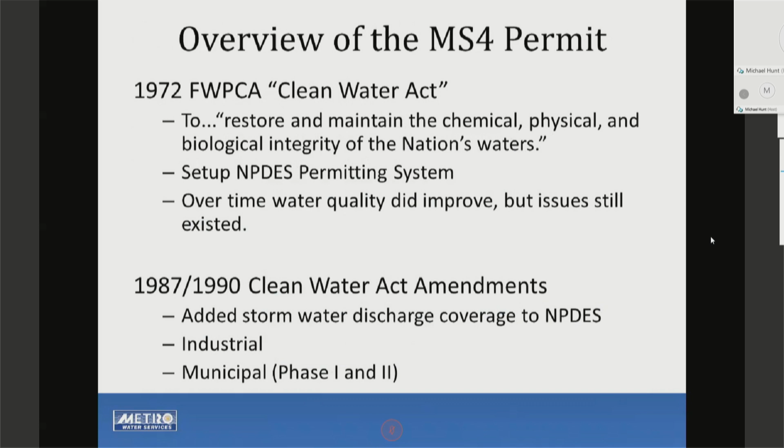That led to the 87 and 90 Clean Water Act amendments that added stormwater coverage to NPDES. It included industrial facilities that might not have a processed wastewater discharge per se, but just by the nature of their facility had stormwater runoff that introduced pollutants into the system. It also added phase one and phase two municipal permits, which included the stormwater systems in cities, phase one being larger cities such as us, phase two being smaller cities and counties. The finding there was that just by the nature of a city being a city, and people conducting the activities they do, without some kind of special and ongoing programs, that can also lead to pollution making it into our waterways.

This is a schematic from EPA that goes into the general activities that can contribute to that, all the way from factories, industrial facilities, private sanitary overflows, different types of activity, even non-point things like the application of fertilizers, herbicides, and whatnot can play into what contributes to pollution from urban wet weather flows.

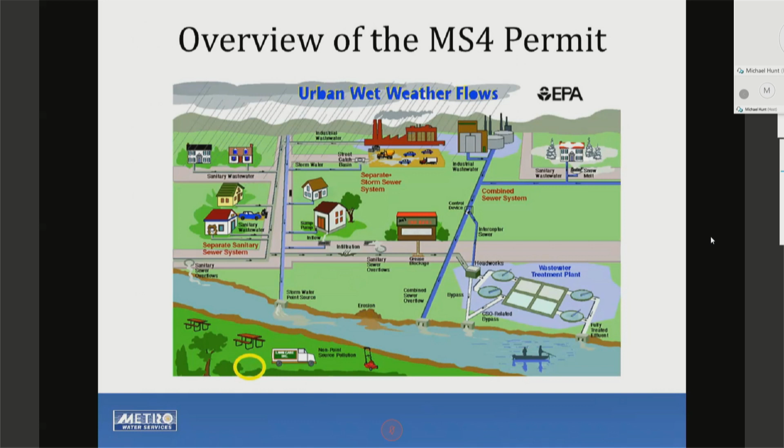This is a map of Davidson County. Our MS4 permit does not cover the entire Davidson County area. There are some exceptions by rule. Those exceptions are the satellite cities. They are generally covered with their own phase two permits. We do try to coordinate with them as it relates to getting the right information to the right people, but they have their own programs.

The brown areas show the combined sewer areas, which means stormwater and sanitary waste is combined in routing to our plants, and during certain periods of heavy rainfall may overflow. The rest of the area is the MS4 permit area. So a very big area, being a municipality.

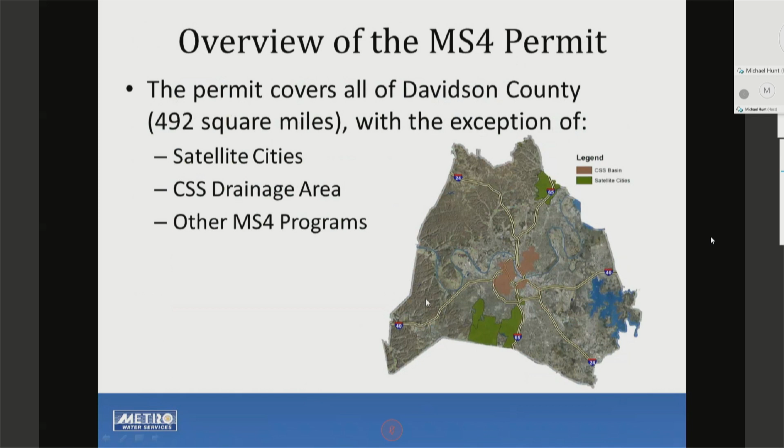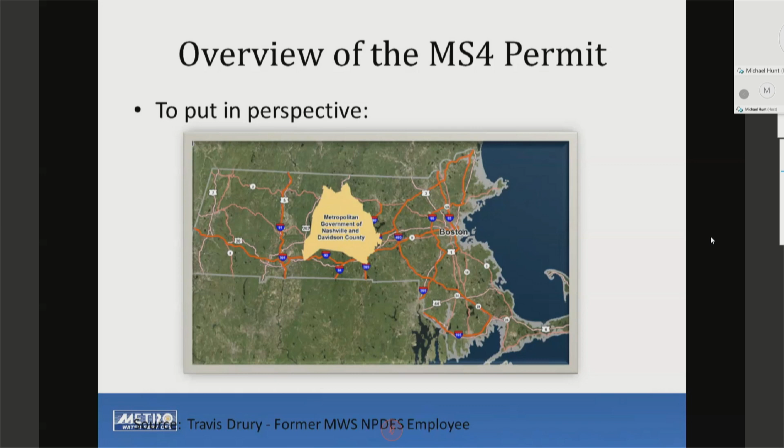We are a very large MS4. We've looked at over time how we rank, and with about 500 square miles, we're one of the larger MS4s in the country, certainly one of the top 10. One of our former employees put this together comparing us to Massachusetts and Boston, so you can see we're a pretty big MS4 permittee.

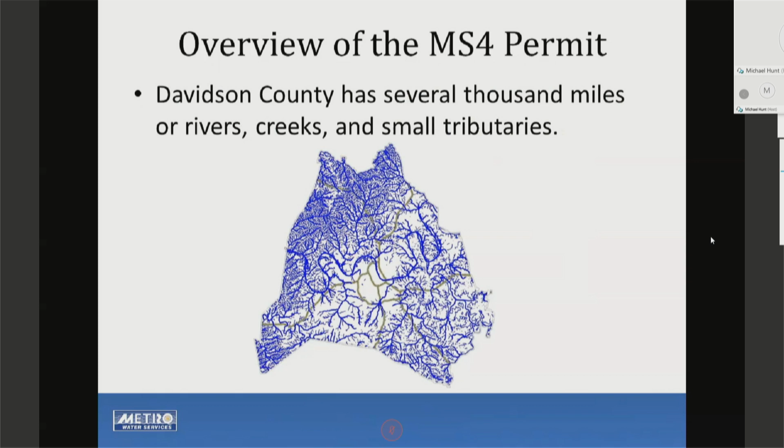One of the reasons it's so important that we do what we do with our MS4 permit is that Davidson County is blessed with a lot of water resources. We have thousands of miles of rivers, creeks, and tribs. So what we're doing to prevent polluted runoff is very important to Metro, and even more reason we're attentive to these permit requirements and doing what we need to do to not have either chronic or acute discharges.

So how all of this got started was in July 1st, 1996, Metro was issued what's called an NPDES permit by EPA and TDEC. Being a phase one permittee, our permits always have to get EPA approval, Region 4 approval as well. So we're working all the time with TDEC mainly, but EPA has a role as well. We got a permit in the beginning that contained any number of programmatic elements that we as a city were expected to do to curtail and, to the maximum extent practicable, reduce stormwater pollution to our MS4.

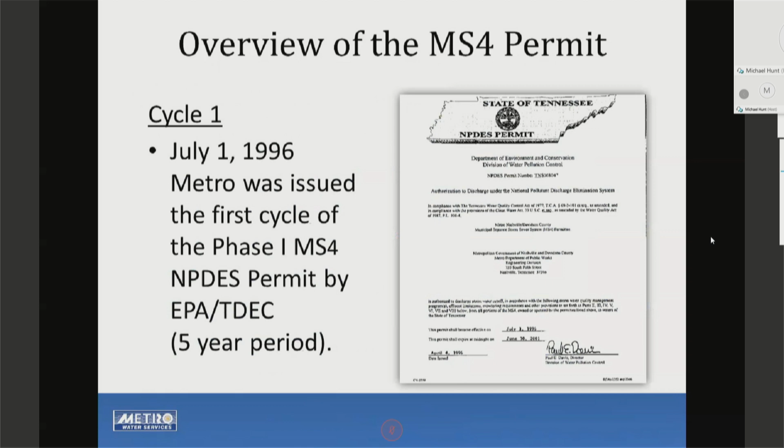Some of the things in that cycle one, we had to establish regulations as it related to quality. We already had the floodplain regulations and some of the grading permit regulations, but we had to modify that to bring in development. We had to bring in a non-stormwater, or what we call an illicit discharge ordinance, Metro Code 15.64.205, which basically makes it illegal to have a non-stormwater discharge to the storm sewer system.

We had to collect GIS information for that 492 square mile MS4 permit area. That's an old number — the last time I checked, we're up to about 250,000 MS4 features, and we are on an ongoing basis. We have one person dedicated to doing nothing but updating that MS4 data. I will tell you, in the beginning that was quite a chore to go out and collect. We had, I think at one point, 18 teams of two going out collecting that data. So it's very valuable, and it's something we maintain and update all the time.

I would just say at this point, if any of you are doing anything — I know we work a lot with Public Works on some of their cross drain projects — but anything you're doing that might change an MS4 element, a pipe, or whatever, please let us know, and we would love to plug that into our system because it needs to be as up to date as possible.

We also had to perform field screening on what is now more than about 4,000 outfalls just to make sure we don't have any illicit discharges.

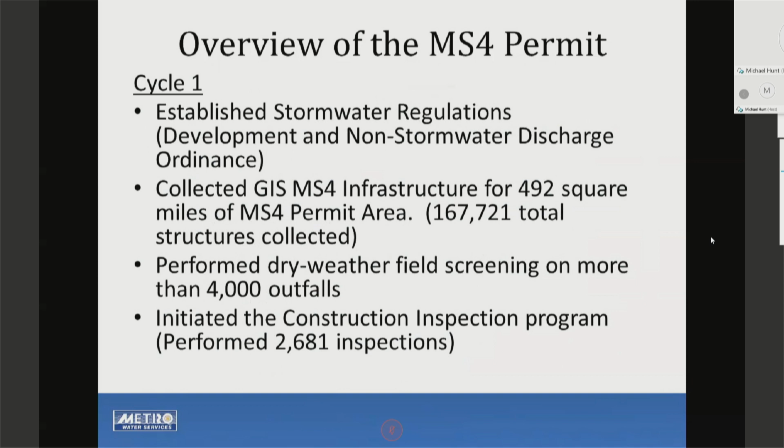This again is an old number. We have performed tens of thousands of those inspections over time, and it's really made a big difference that we see in some of our data.

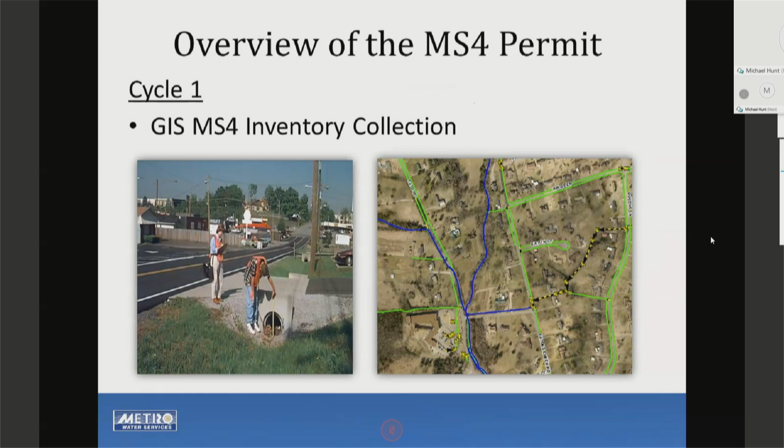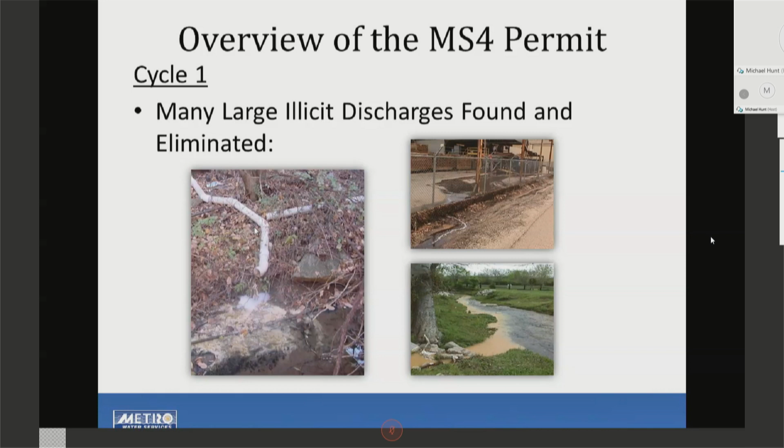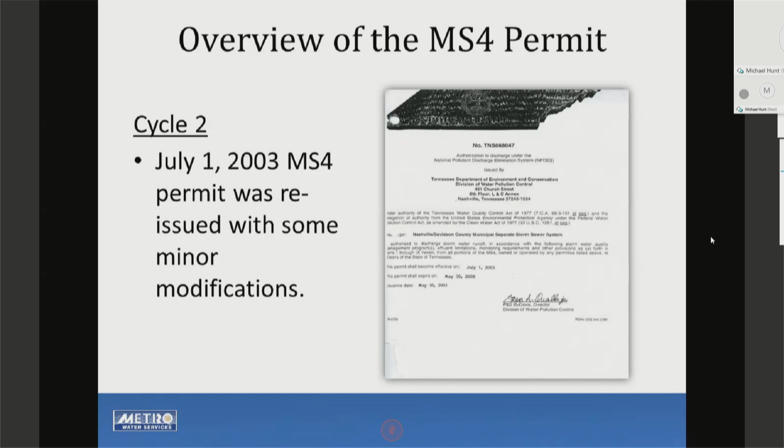Cycle two: these permits are issued on a 5-year basis. Our next permit was issued on July 1st, 2003. It basically built off the first permit with some minor modifications.

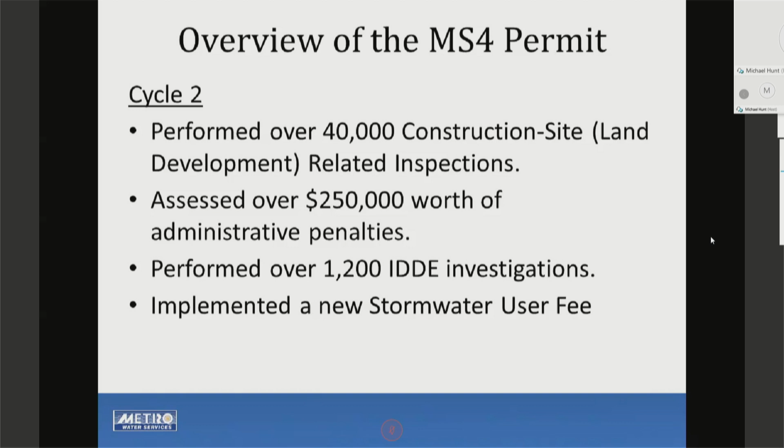Then during phase cycle two, we did implement a new stormwater user fee. There were a lot of things that went into that, but one was that EPA, in their remarks during one of our audits, mentioned that we really needed a dedicated funding source to perpetuate and make the program resilient. So in cycle two, we stepped up construction oversight.

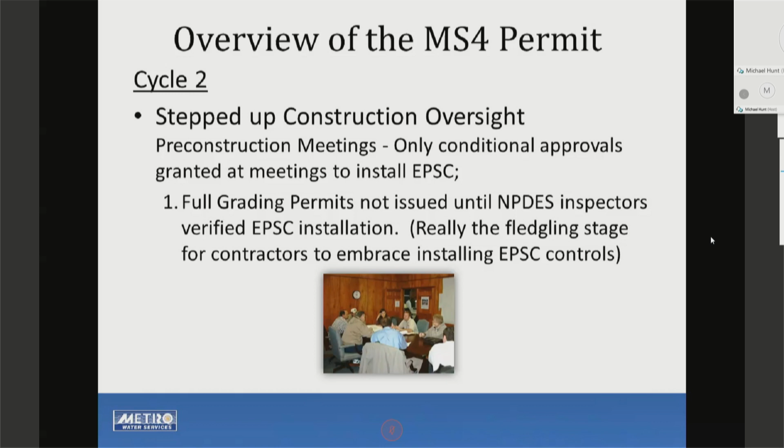We added pre-construction meetings before we issue a grading permit. The project reps come in and meet with us—obviously not right now, but had been and will once we get past this current situation. We sit down, talk about the project, and make sure the EPSC inspection is going to go well, and that's really helped us in that regard.

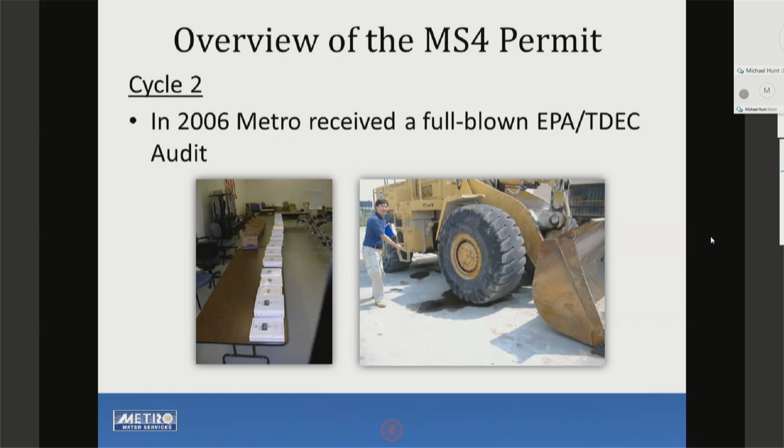I mentioned the audit that was in 2006. On the left is the paperwork we had to provide. On the right is the EPA inspector going out and looking at some things. One thing I'll tell you: when they come in, the first places they want to go are to Metro sites, with the thought being that we should have a control and a handle on that.

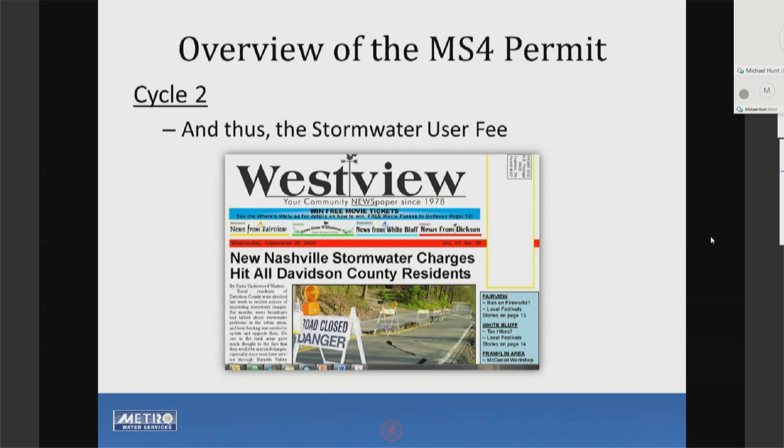I mentioned the dedicated funding source—this is just a reference to that, which was in their report. They talked about the stormwater user fee that came on board, ironically, just before our flood. And so that sort of brought stormwater to the front in a pretty big way during that time as well.

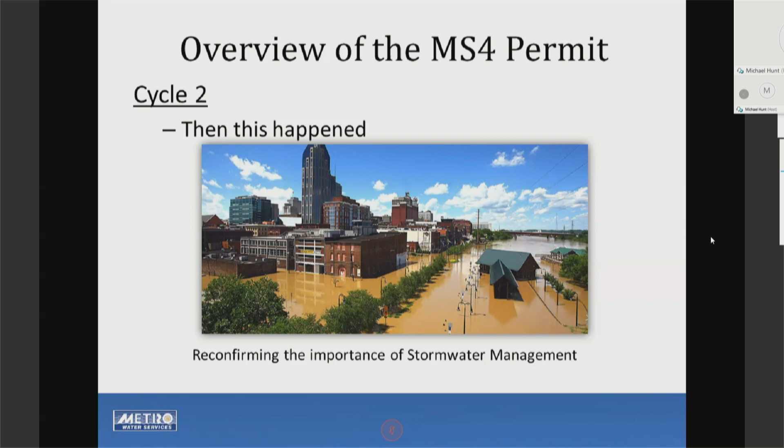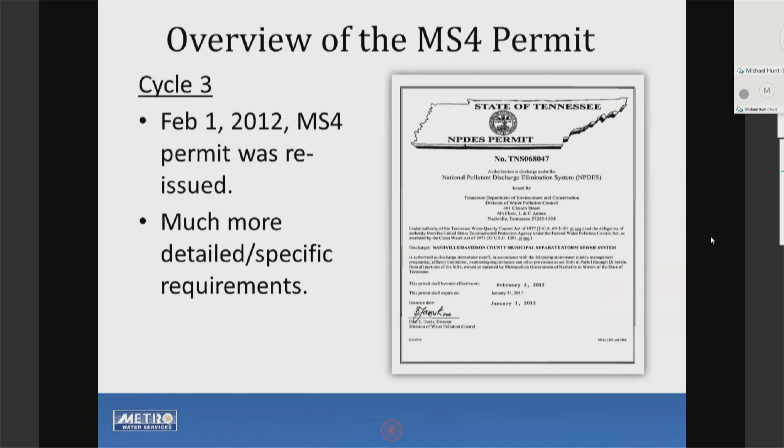Cycle 3 was issued in 2012. It's the permit we're currently working under that's administratively extended. In this permit, we got much more detailed and specific requirements. It's been extended now, and we're looking at what our new permit requirements might be. We are looking at an inspection audit from TDEC in the coming months. It's been delayed by the current situation, but we are anticipating this, and it will likely involve Metro facilities, which is why we've been reaching out to you.

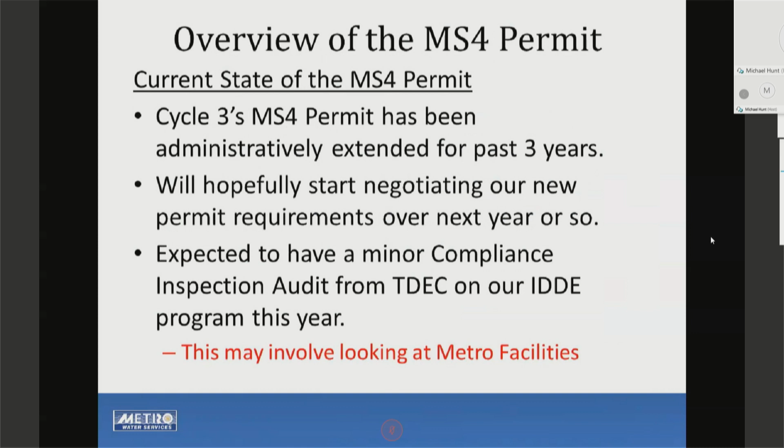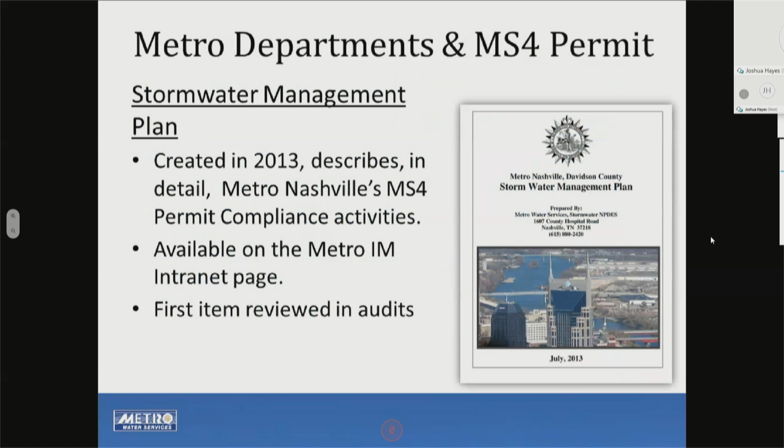This stormwater management plan basically goes through every permit requirement in the MS4 permit and describes in detail how we meet those requirements. So this will be the first thing they ask for. If we have written information and processes in that plan and give that to them, when they come to do their audit, they're going to ask to see that in place in the field. So if we put in the plan that we're coordinating with OEM and Public Works on spill response, they're going to want to see how we do that when they come here. So we need to make sure we're following and adhering to that plan.

As Michael mentioned and Mr. Potter mentioned early on, the whole reason for our MS4 permit is to reduce pollutants from urban stormwater runoff into our streams. Within the county, TDEC and the EPA have listed over 251 miles of stream currently considered impaired for a variety of pollutants. This could be E. coli, sediment, nutrients, nitrogen and phosphorus. Some stretches of stream are impaired for multiple parameters.

But most of these streams listed as impaired have TMDLs that set numeric limits on the pollutants that can drain to them. It's important that we try to stay within those limits, because if we exceed them, the EPA could actually come to town and put moratoriums on certain developments in certain neighborhoods, which we don't want. So that's why it's important to follow TMDLs.

We've worked diligently. Our watershed group has, over the last 10 years, been sampling all of our streams in the county. We do projects as organizations, like sewer rehab projects that improve or reduce the amount of overflows and bacteria into our creeks. We just have to prove to TDEC that these projects are actually reducing the pollutants to our creeks.

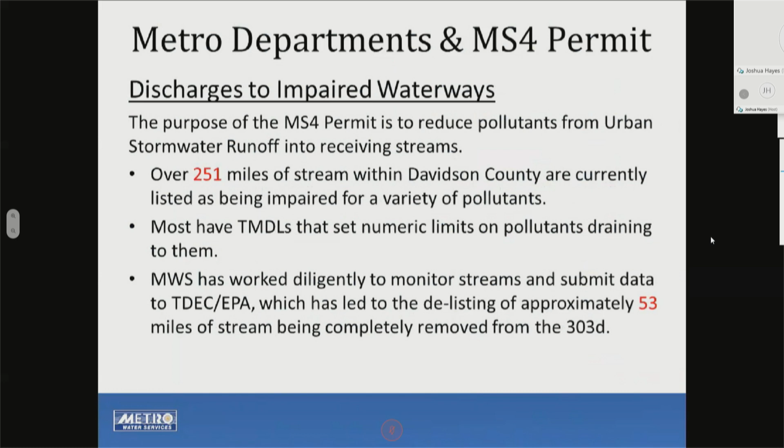So that's where the sampling comes into play, and we have to do a whole gamut of sampling following strict TDEC and EPA guidelines and protocols, and submit that data to TDEC. By submission of this data over the last 10 years, we've gotten over 53 miles of streams removed from the 303D list, which is very important for our community.

In the MS4 permit, it talks specifically about discharges to impaired waterways, and that we as a metro government are to implement two types of controls: structural controls and non-structural controls. The majority of this presentation and what we do from a metro department standpoint is considered non-structural, where it's programs and processes we put in place to reduce pollution coming from properties, our maintenance activities, and us overseeing development to reduce pollution. Those are all considered non-structural controls.

But there is an aspect of our permit that requires us to consider installing structural controls proactively to try to improve the runoff from our metro properties into creeks. We refer to those as structural controls, such as a sewer rehab project, or a stormwater retrofit.

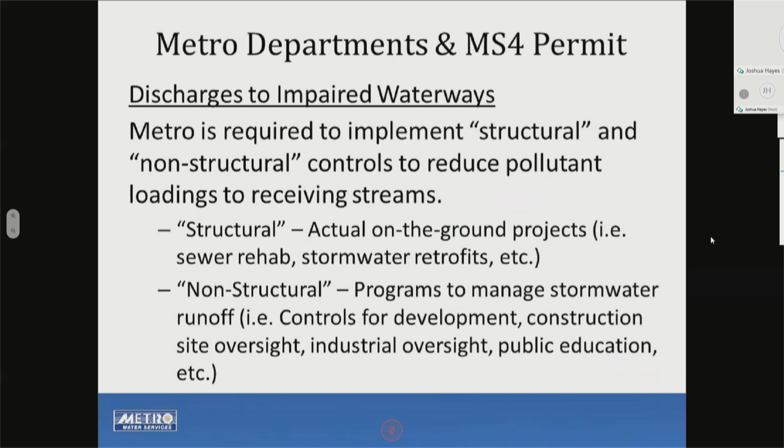So in an effort to improve this, we dedicated within the last couple of years a portion of our stormwater user fee funds to go towards doing large projects that would improve runoff from metro properties into waterways, or into the MS4 before draining into waterways. We're always looking for good candidate sites, metro properties that have potential for stormwater retrofits or stream bank stabilization opportunities. We've already started working on some, and we've got one in the ground already.

In 2016, we began sampling our dog parks around Davidson County. We worked closely with our parks department during this process. We're obviously concerned about the runoff. We promote people picking up their waste as much as we can, but it's human nature.

And there's just people that will not pick up their waste, and we understand that. So we did sampling of the runoff at many of these parks, and we found a couple of them where the drainage was configured so all of it would come to one confined ditch or outfall. When we sampled that outfall, it had really high levels of E. coli. Some of the sampling data, the levels were approaching what we would see in a typical sanitary sewer overflow as far as E. coli levels.

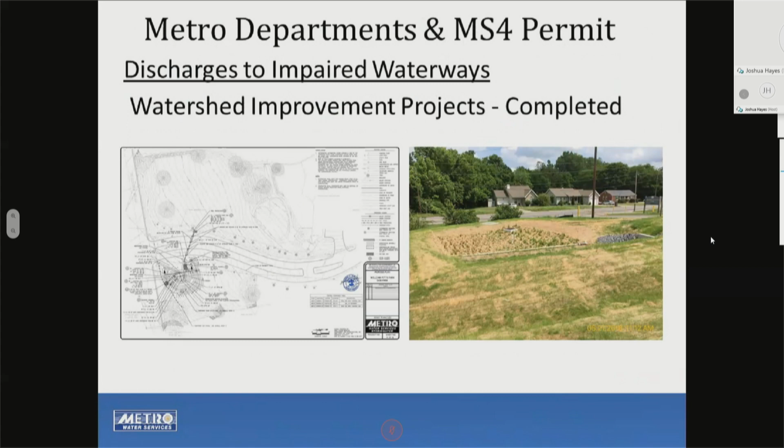So obviously we can't just sample, find that, and not do anything. We had to try to address this issue. Closing down the dog park isn't a feasible option for the neighborhood. So the best thing we came up with is to try to route that drainage through some structural controls. This is a bioretention basin we designed, permitted, and installed about two years ago at Pitt's Dog Park, off of Tusculum Road. The whole idea is to direct runoff from the dog park into the bioretention basin so that it can infiltrate into the ground instead of going straight into the creek, which is only about 100 yards away.

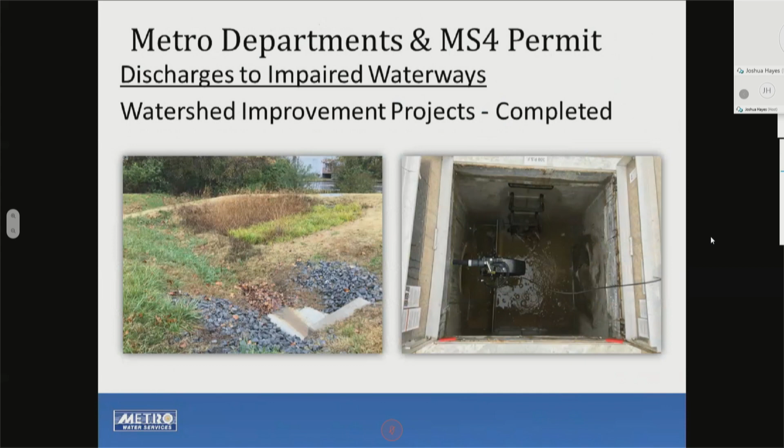By capturing the runoff, we should be capturing the bacteria associated with that dog waste, and any nutrients like nitrogen and phosphorus also associated with it. We're actively out there now — we've put meters in the upstream and downstream junction boxes to monitor the flow, so we can prove to TDEC and the EPA the amount of flow reduction and overall pollutant reduction we've achieved coming off that park. So that's something we're excited about. We've got several other projects in the works right now that are being designed and finalized, and we're getting permits for and trying to fund going forward.

This is a police impound lot near our Omohundro water treatment plant. It's a large area that's almost 100% impervious pavement — a big hill with a valley in the middle, and in that valley is a stream that ultimately drains to the Cumberland River. We've worked with the site and put together plans, and they do the best they can to prevent oils and other pollutants from contacting the pavement and running off into the stream.

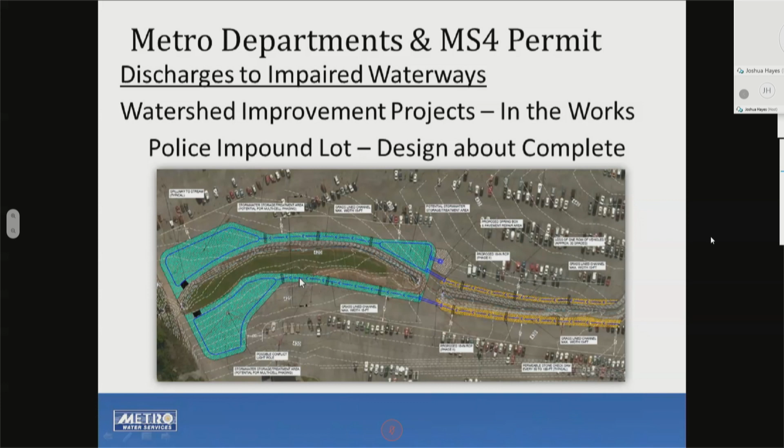But we feel we need to retrofit this property to improve the water quality entering that tributary to the Cumberland River. So we've designed a project, about to be finalized, where we'll install some water quality swales and a detention basin to try to treat this runoff before it goes into the tributary. We've worked closely with the police department — they've been very helpful throughout this process. Incidentally, they experience a lot of flooding during heavy downpours because there's a bottleneck in the culvert downstream under the railroad track. We think this project, while designed to treat water quality, may also help with that flooding issue by providing some storage for them.

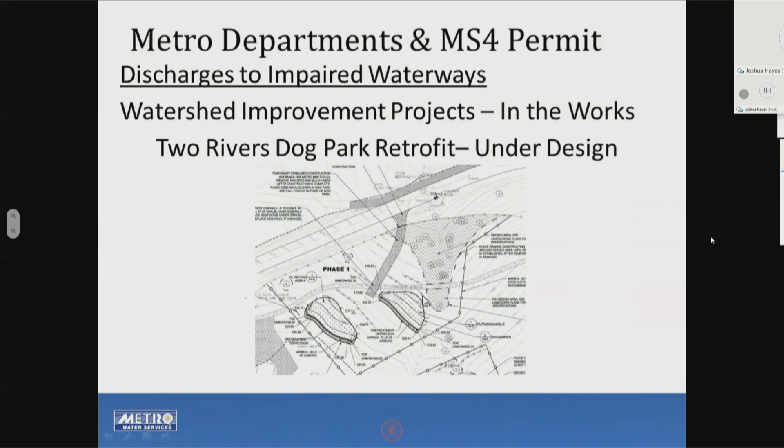Another dog park we're looking at for a project, which has a concentrated flow path coming from the site, is the Two Rivers Dog Park near McGavock Pike. That one's a little different — it has a large drainage area, so we can't just put one little bioretention basin to treat and capture the water. We'll have to do a combination of structures: some bioretention structures, plus vegetative management practices where we fence out the dogs and try to restore native grasses and prairie mixture to treat that runoff before it goes through. We've finalized the design on that, and it's just awaiting funding going forward.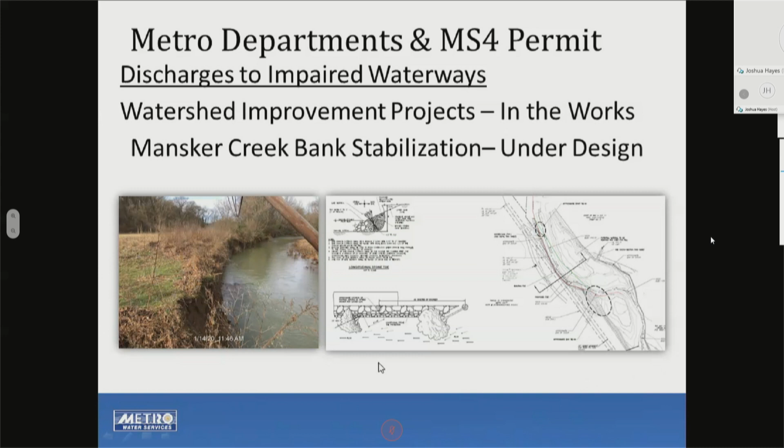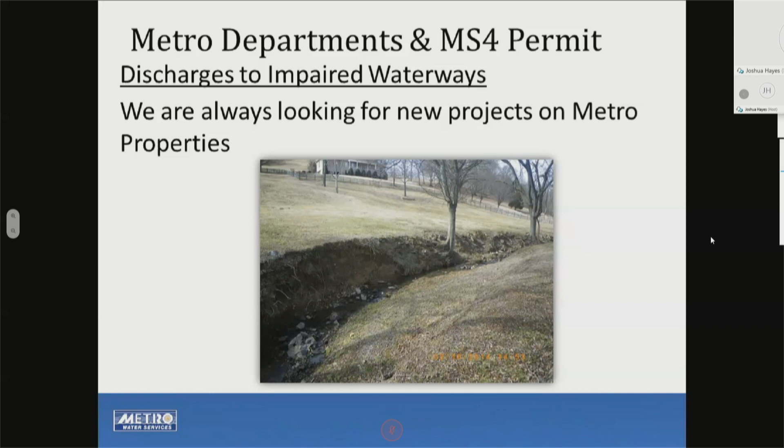We're always looking for opportunities. So when you go back to your properties and you're walking around your facilities and you see opportunity, it's not just stream bank stabilization. If you have a large parking lot that drains straight to a creek, with a lot of cars parked on it, and you see oil sheens come off when it rains, we could look at doing a structural retrofit where we put in an oil water separator or some other type of structure that separates the pollutants before it drains to that stream. So we're always open to ideas. Just let me know, shoot me an email, and I'll come out and look at it, and we'll see if there's good opportunity on your sites.

So I'm going to shift gears now to talking about more of the non-structural controls that we need to implement as metro departments across the spectrum.

One of the first things in our permit is public information and education and public involvement. In 2012, we put together what we call our PIE plan, which lays out all of our educational targeting that we're going to try to meet, that we're still working on, where we identify hot zones and do mail outs. We can also have meetings in certain neighborhoods, workshops for different types of industry, such as landscapers. That's stuff we've already started, but we need to continue going forward.

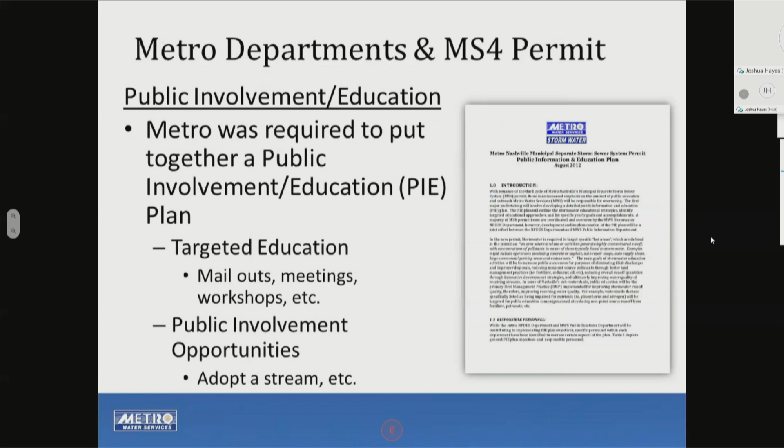We're always looking for public involvement opportunities, such as Sonia's Adopt a Stream program. We're working with Cumberland River Compact to get the community involved in things. But Allison's going to talk a little bit more about how we can work with other metro departments to partner on different educational opportunities.

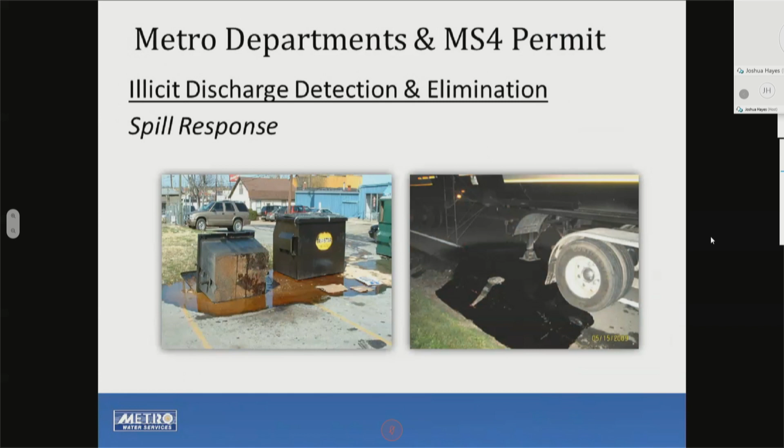Within our MS4 permit, it specifically says we have to coordinate and address spills on roadways and private properties that drain to our MS4. We work closely with the OEM department and the Public Works Hazmat department, and we have somebody available 24/7 on call that can respond to spills. We don't clean them up - Metro's role is just to make sure the responsible party cleans up the material and to assess the impact. If it's a huge tanker truck that's going to really impact a creek, we need to start that coordination through OEM, TEMA, and TDEC to make sure all those impacts are reported. So that's something we work together on.

Another aspect of our MS4 permit, and really the key aspect of our entire permit, is our illicit discharge detection and elimination program. It's got several different elements. You'll probably hear us refer to it as the IDDE program, or illicit discharge program.

One of the first and most important elements is mapping all the storm drains. As Michael mentioned, in that first cycle we spent a lot of money and time mapping all the storm drains in the entire county. There's a provision in our permit that says anytime we change any of that drainage - if there's a sidewalk project that changed the drainage configuration - we need to update our GIS system within 9 months of completion. This is actually in our permit. So anytime you have a project as a Metro department where you're changing our drains, we need to know about it.

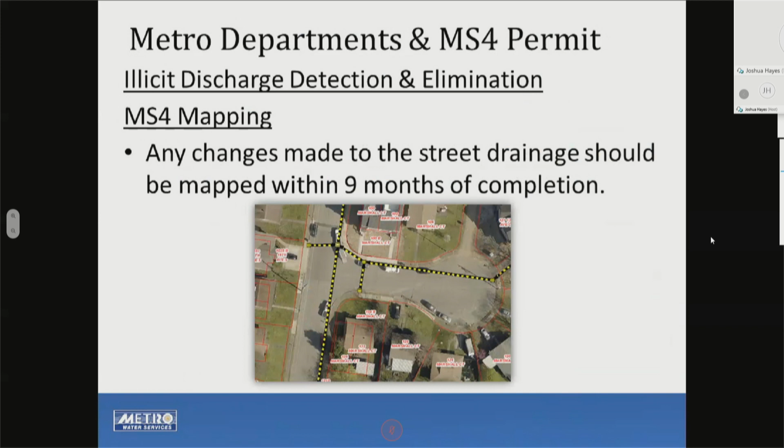Also within our illicit discharge detection program, we have several different avenues that we find and detect illicit discharges and get them eliminated. Our permit requires us to have a citizen complaint response program, which we do. Hub Nashville has been very integral in expanding that as we've gotten increased amounts of complaints coming in about stormwater pollution. So we have that in place where we allow the public to report pollution.

We also do proactive programs like inspecting industrial facilities. Many industrial facilities have stormwater permits from TDEC, but we go out there and proactively inspect them, given all the potential for materials they have exposed on their property that could run off.

And we find issues with that. We have a dry weather field screening program where we're inspecting commercial facilities, looking at their dumpsters and grease bins. We work together with the codes department and our pre-treatment section in Metro Water on that.

We do something that's not in our permit, above and beyond. We partner with the police department to use their infrared aerial photography in their helicopter to fly certain creeks during the winter months, looking for thermal anomalies that may indicate a sewer leak, a water leak, or a potential illicit discharge. Our watershed group is out there walking, assessing our streams daily, looking for potential impacts.

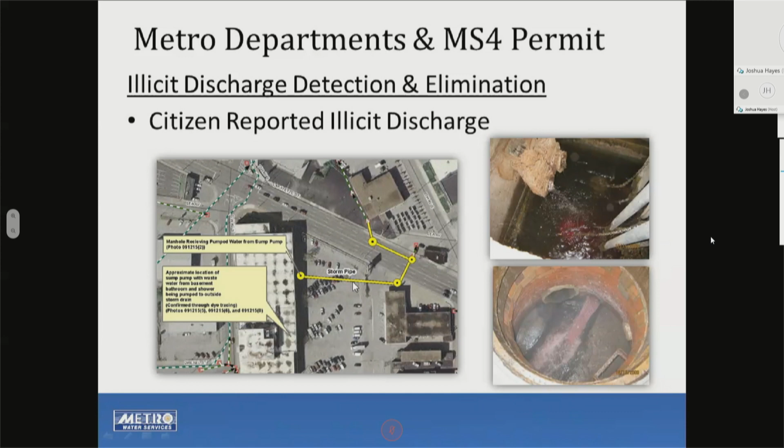Allison, who I mentioned and will present here in a minute, is over our industrial inspection program as well. These are some of the things we have found over the years. Fortunately we don't find this often, but from time to time we find issues where industrial product is exposed on the ground that could flow off into our MS4 or our streams.

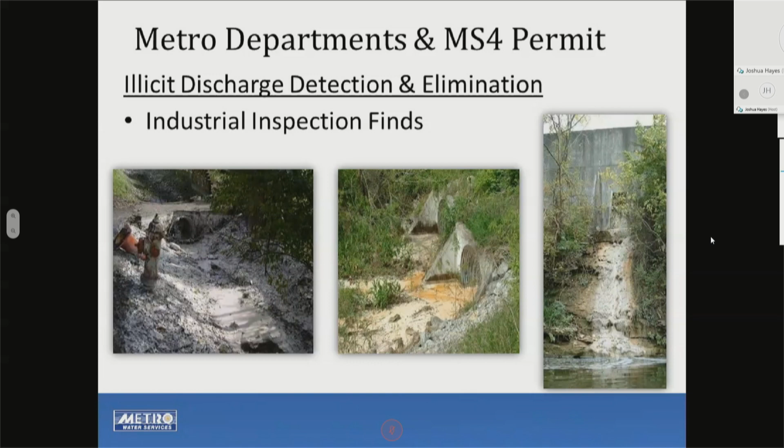This is a concrete ready mix facility. We have a lot of issues with ready mix facilities, especially when development is booming like it was previously. They're not keeping their pits clean, and we get discharges like this to the river or creeks. So we're out there finding that regularly.

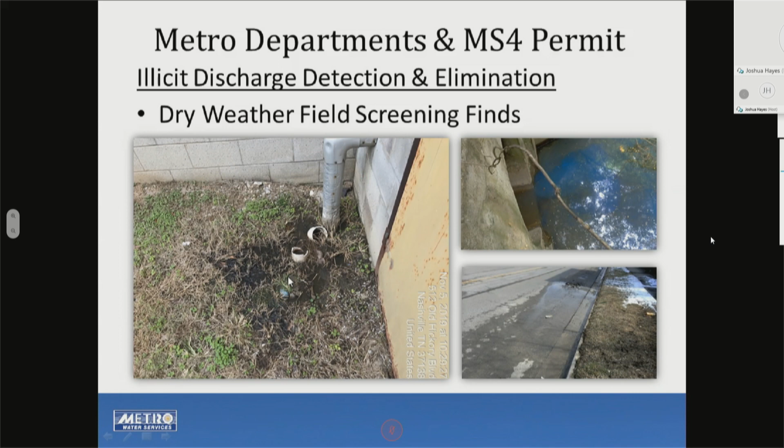And we work with other departments on this. When we find a sewer clean out issue, a lot of times code sanitation has more enforcement ability than we do. If it's not reaching a creek or MS4, we rely on them to get the situation corrected.

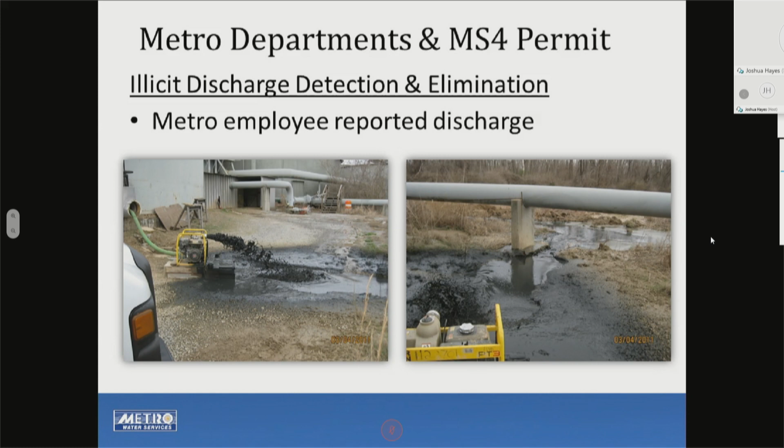This is an example of a Metro employee reporting an issue to us in the past. Andy Welch, I'll give you credit on this one, was driving near the river and saw a big plume of black liquid going into the Cumberland River. He called us, we went out there and found the site. An industrial facility was pumping their sludge tank right into the river. We were able to stop it immediately, enforce on it, and coordinate with TDEC. But we relied on employee notification for that.

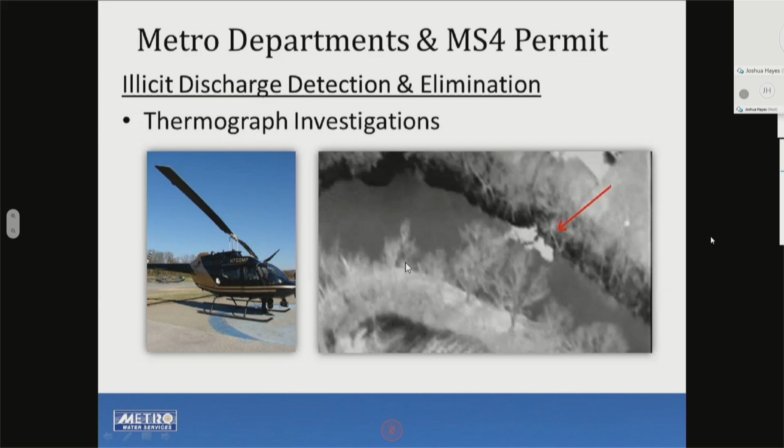In the winter months, when the stream cools down to a certain level, the groundwater will put off a heat signature, but so will sewer leaks, water leaks, and illicit discharges. So we fly certain creeks when weather permits during the winter months and look for these thermal anomalies. When we find them, we do field sampling to determine if it's a sewer leak, water leak, or just groundwater. We also work closely with our system services folks in Metro Water.

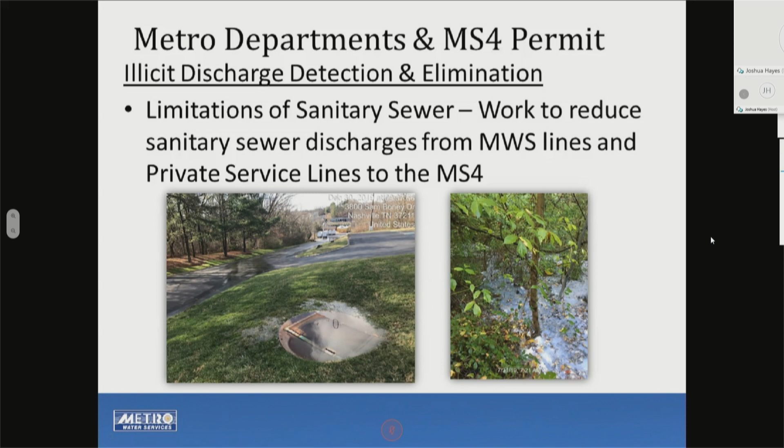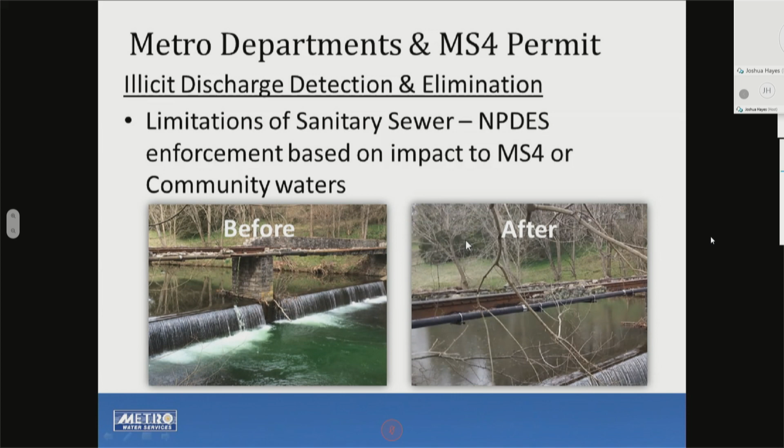This is an example of a sanitary sewer issue we found a couple years ago, where there was an aerial sewer crossing, which was a private service lateral, and we noticed it leaking. Dye traced up to a house - actually 2 homes tied into it - and we were able to get them to repair the sanitary sewer leak.

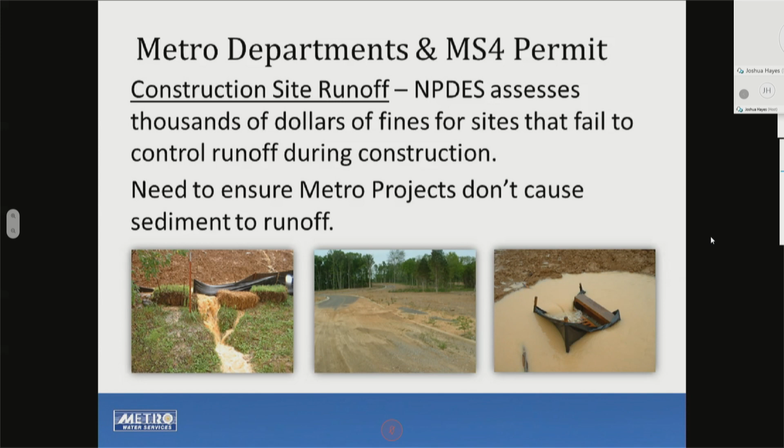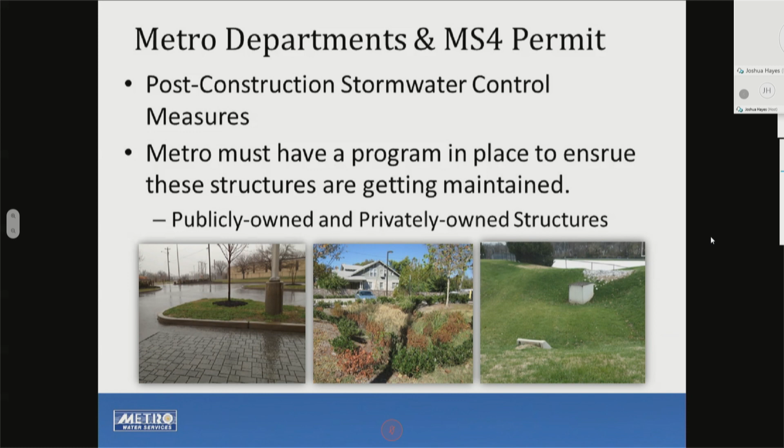Sites that develop, whether Metro property or private property, are supposed to put controls in during construction to prevent sediment runoff, but they also have to have permanent controls to prevent issues with increased stormwater runoff and pollutants after the site's built and approved. We have to have a program in place to oversee those.

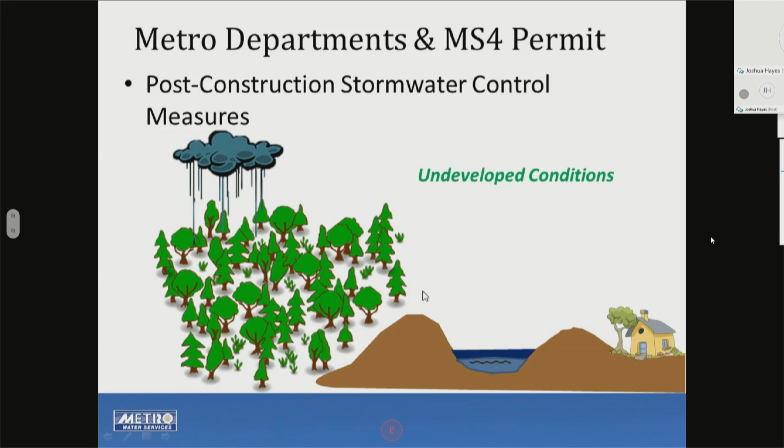To understand how important this is: on a normal wooded or grassy site, when it rains, a lot of that rain soaks into the ground. If it's a large rain, you'll get a slight rise in the creek, but it's mostly clean water. When we remove all that vegetation and put in asphalt and buildings, 90 to 100% of the rainfall washes off straight into the creek without any treatment. It's going to cause downstream flooding and wash all the pollutants from that parking lot or building rooftop straight into the creek.

So the whole idea of stormwater treatment is to put something in between this. Obviously we want to allow development to occur, but it has to occur smartly. These structures we allow to be designed and put in place function by either detaining water in some cases and slowly releasing it, settling out pollutants, not overwhelming the system, or they promote infiltration into the ground where water doesn't run off the site, but pollutants filter into the soil.

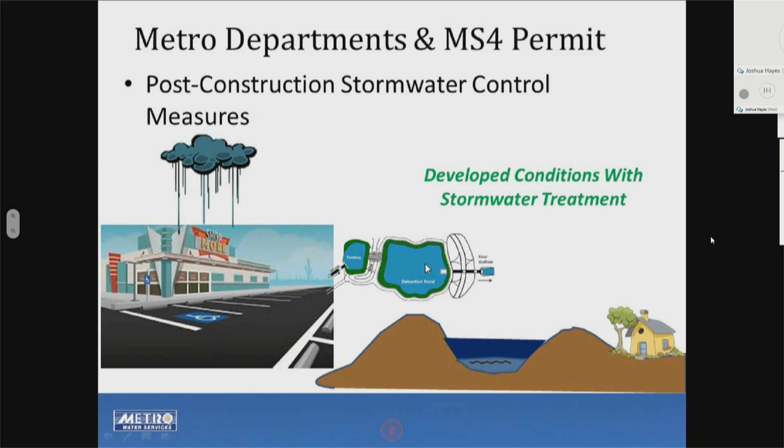But if these structures aren't maintained, they're just going to overflow. This is a detention pond holding water, where when it rains, the detention volume isn't there anymore - there's an overflow at the top of the structure, so it just overflows straight and goes out.

So there's no treatment. These underground water quality vaults that filter stormwater runoff have reached capacity. All of these are designed to overflow - we're not going to allow something to be put in place if it clogs and backs water up on a parking lot, causing a safety issue. So they're all designed to have overflows, meaning if they're full, future trash and sediment that washes in will just wash right through.

So we have to have a program in place, and we've started expanding this over the last few years. We inspect thousands of these sites every year and issue hundreds of letters to property owners when we find a bioretention that's not being maintained, like this one.

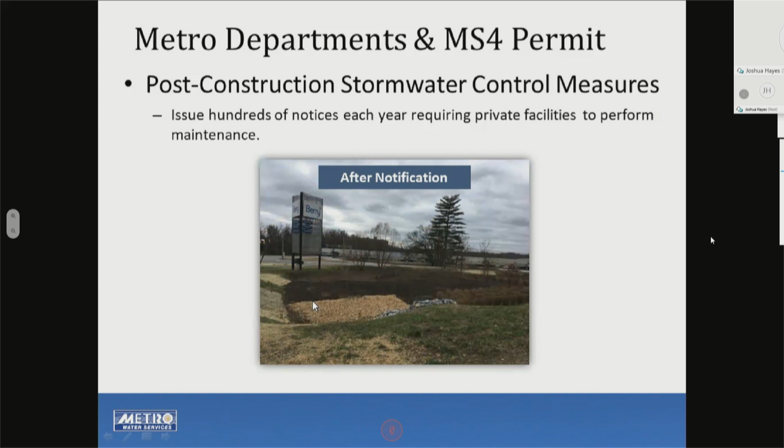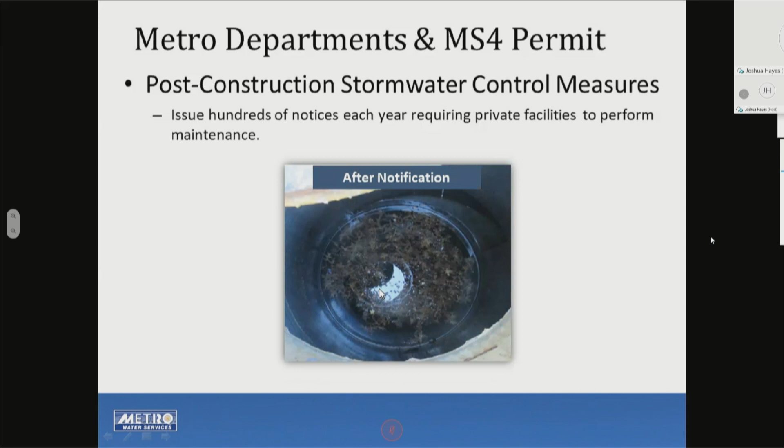We'll issue a letter and get them to fix it, and we've had a lot of success over the years. This is an example of an underground water quality unit. It's got trash, cups, cans, soccer balls. This is not filtering anything anymore. Anything that comes in now just goes right to the overflow. So we issue letters and get them to clean those.

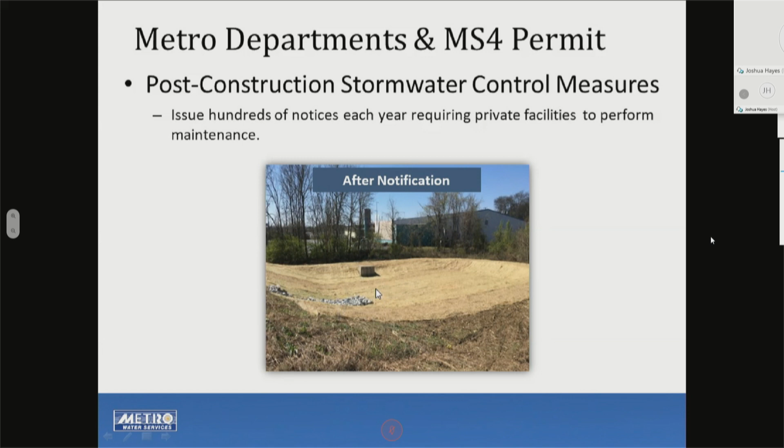This is an example of a dry detention pond. It's supposed to be grass lined, but it's starting to get some woody vegetation. So we sent letters and got them to clean it out and restore it to its original function, having an immediate benefit to the runoff of that property.

So if we're doing this with all of our thousands of private sites, we need to have more scrutiny of the metro properties, because metro properties have these same structures. We've changed our process last year. We used to require you guys to do your own inspections and send reports to us on what you needed to do. We've changed that - we now have enough resources to send people out to all the metro properties every year and inspect those.

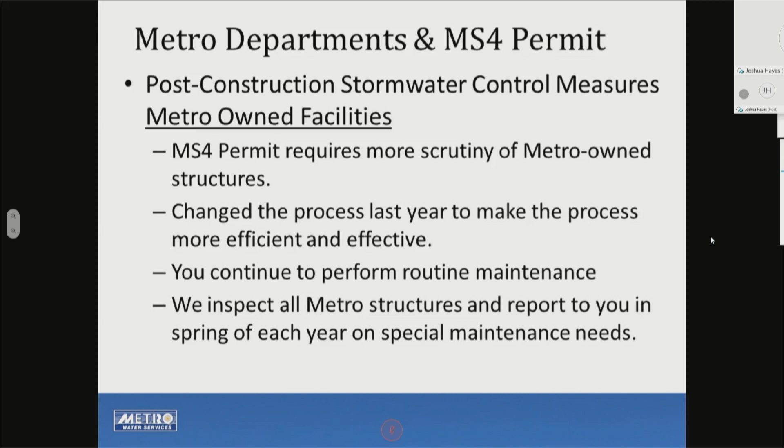We just finished up this round, and you'll be hearing from Liz Steinstraw. She's our main contact - some of you have probably already heard from her - but she'll be coordinating with you shortly on some of the major maintenance issues that need to take place on these stormwater control measures. It's very important that you respond back and make sure the major maintenance is addressed within this year.

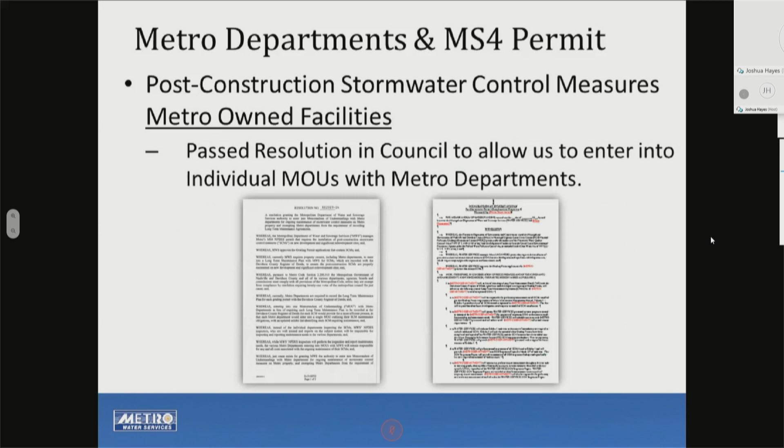Earlier this summer, we had to pass a resolution in council to allow us to treat metro departments a little differently than we treat our private sites, since we're doing our own inspections. That has been passed, so we're looking to get all the MOUs revised with all the departments this summer and put into place. You'll be hearing from myself, Liz, and our legal counsel to help get that in place as the months go on.

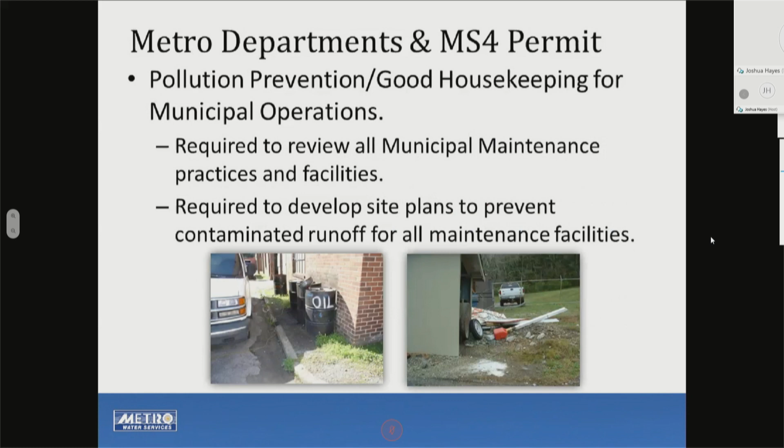On our metro properties, we also have to make sure there's no impact to runoff. We have maintenance facilities in a lot of the different departments - Parks has them, Public Works has them. Back in 2013, we put together what we call runoff management plans for all the facilities, such as Public Works and Parks maintenance and golf course maintenance sites. It requires the site people on the ground to do routine inspections to make sure there's no oils, paints, or other material exposed to stormwater runoff, and if there is, to clean it up.

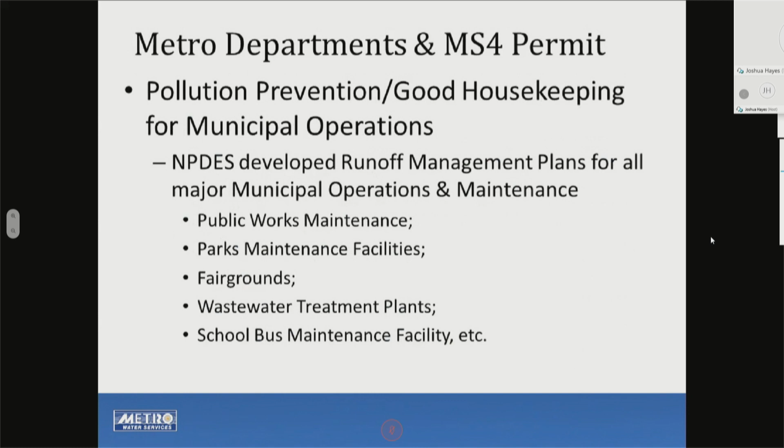That's one of the things TDEC will check on when they come to do an audit. This is an example of the plans we've put together. All of this is available on our intranet page, and this is the link to the page I mentioned earlier. Everything we have as far as our stormwater plan, our runoff management plans for maintenance facilities, and our employee training is on this website link through our intranet, the IM page.

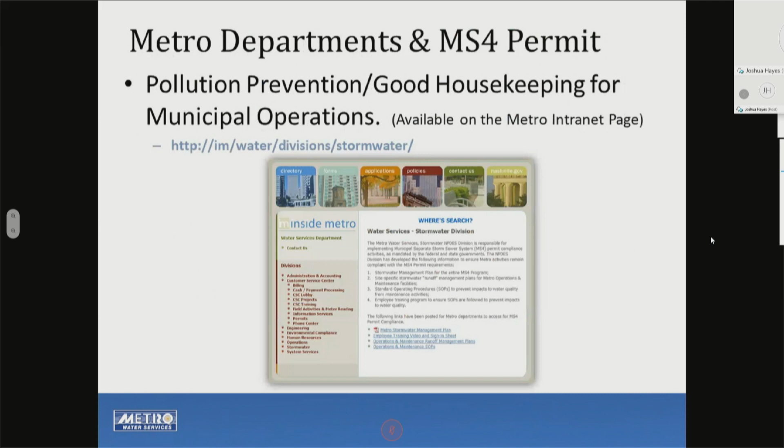We also put together SOPs for specific departments, so we have processes in place. If you're digging a pit, you've got to pump the water, and it's got to be filtered. If you're cutting concrete and you've got a wet saw, all that sediment coming off in the discharge from that slurry needs to be filtered so it doesn't go straight into a storm drain. We created SOPs to address these kinds of issues.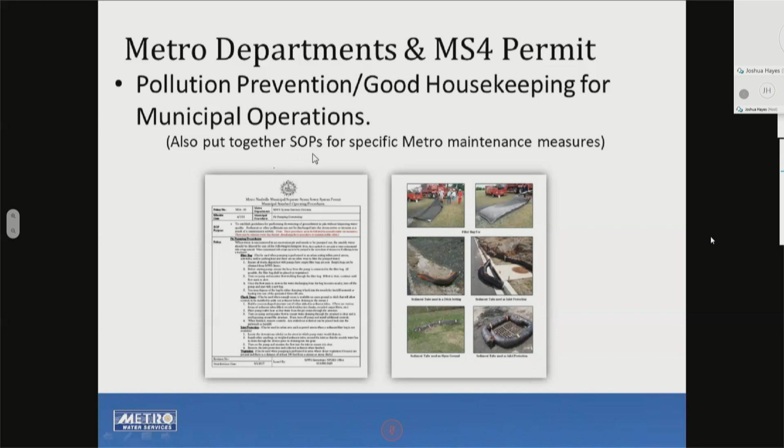We have these SOPs, and we need to make sure our employees are trained on those. Allison's going to talk a little more about that, but she'll be reaching out to you all in the future to make sure we get all the maintenance employees trained on the proper procedures.

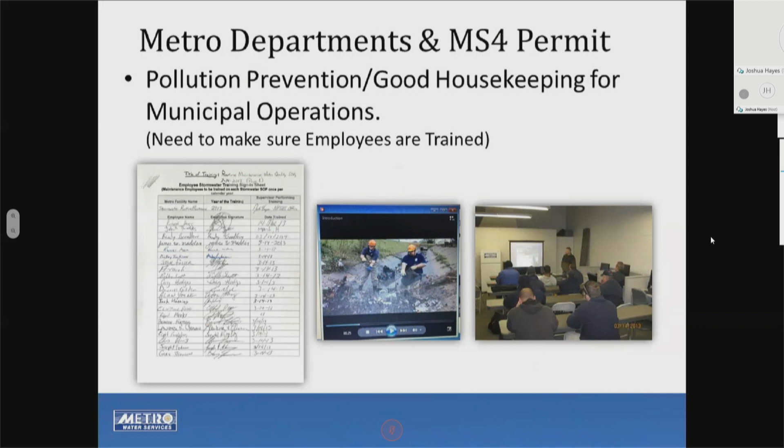Also, any facility, whether it's a maintenance facility or not, we need to make sure we have proper storage, mixing, and application of pesticides, herbicides, and fertilizers. When we got our main audit in 2006, EPA requested copies of all the licensed applicators for all of Metro government. We had to coordinate with every department and get everybody who was licensed through the Tennessee Department of Agriculture to apply chemicals. So make sure whoever you have in your department goes through the Tennessee Department of Agriculture program and gets certified to apply chemicals, and that they're storing those chemicals appropriately.

These pesticides are designed to kill invertebrates, so if they wash downstream, they can kill invertebrates in streams as well. This is a big crayfish kill from a pesticide discharge in a creek.

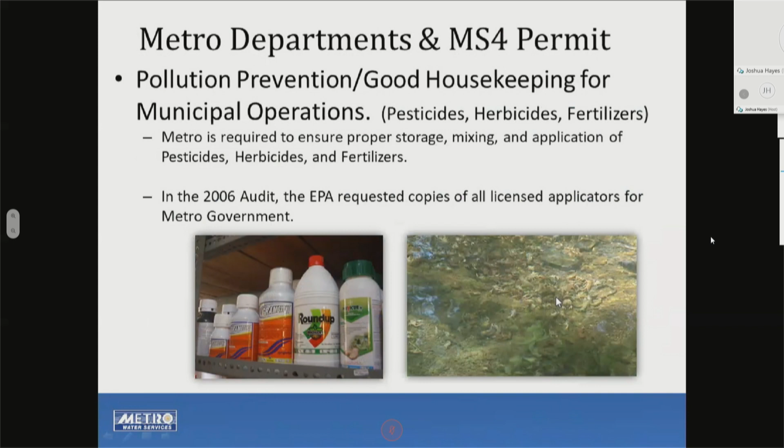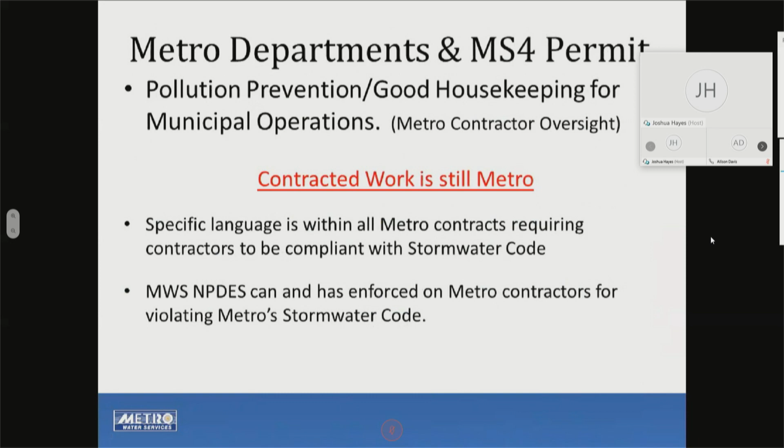And lastly, contracted work is still Metro work. We are not insulated just because we have a contractor. If a contractor is causing a stormwater violation, we are on the hook for it. We can help with that - we can enforce on your contractors if you want us to. There is specific language we've put into Metro contracts, so just get with us if that's the case. But we cannot have an issue where a Metro contractor is also creating an issue.

So with that said, I'm going to transfer over to Allison.

Josh, while you're transferring over, we did receive a question during your part, and I'll take a shot at answering it while Allison gets ready. The question was from Brent Grubb: who reviews MDHA's stormwater structures? There are really two elements to that. One, if it's a new development, our partners over in Metro Water Development Services would review the engineering plans to make sure it met all the stormwater specifications. If it relates to an existing structure, there are various circumstances, and what I'd suggest is if there's ever an issue or question, just get in touch with us and we can consider them on an individual basis.

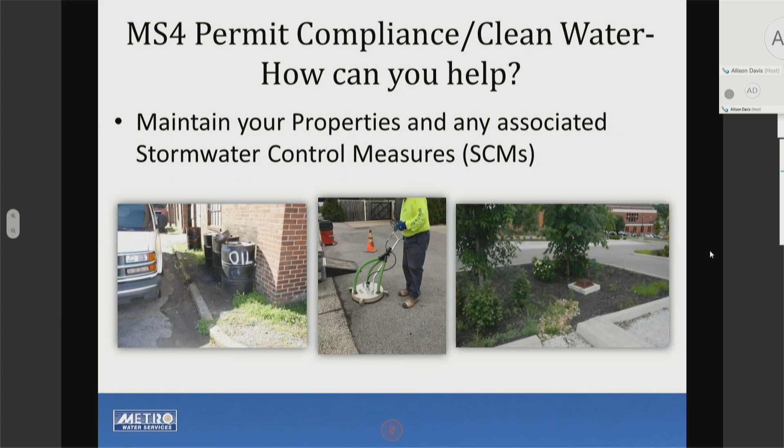A big part of employee training focuses on recognizing water quality issues and knowing who to report them to. We want to use the large amount of maintenance staff working throughout the city to our advantage, including having them identify a water quality issue and report it as soon as it's observed. Immediately notifying our office is critical because illicit discharges can often disappear before our office can respond. Even a matter of hours can make a difference in tracing it back to the responsible party. So we just want to make sure once an illicit discharge is observed, it's sent to us right away, and then we'll take care of the rest.

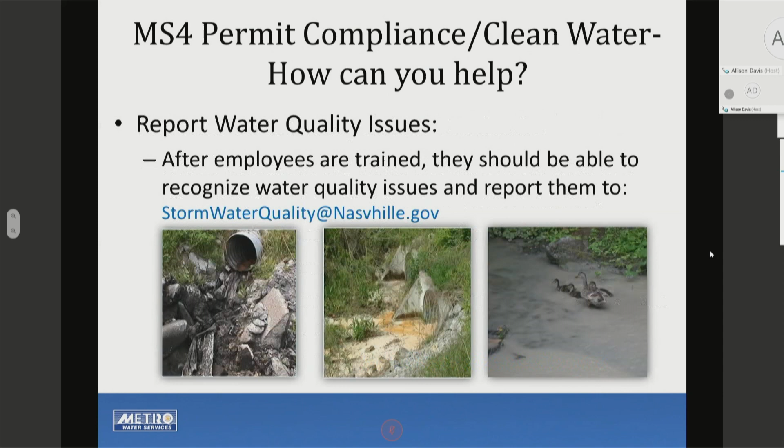We also want to get any updated contacts for each of the departments. These contacts would include ground maintenance staff who keep up with stormwater control measure maintenance, field maintenance managers, and any administrative staff who can provide information for our annual report. Those contacts can be emailed to Josh at the email listed.

As Josh mentioned, I'm the public education coordinator for our stormwater group, and we are always looking for new educational partnerships. A lot of what we do involves educating the public, and we have a large amount of educational materials focused on residential and commercial stormwater issues. A couple of examples: we've worked with Public Works and their Keep Nashville Beautiful group at educational events, and recently I worked with Metro Public Libraries to help promote our rain barrel program.

We can do mail-outs if you identify a certain area, or if you need some educational material. As you know, COVID-19 has canceled a lot of events over the summer, so if you know of any events or workshops coming up and would be interested in having our NPDES staff there, just feel free to contact either me or our Stormwater quality email.

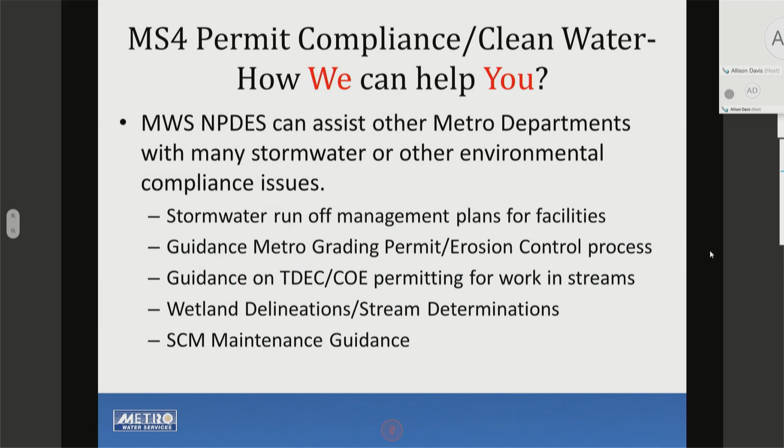Our office is here to help, so if there are any questions, feel free to either call or reach out by email. I will now hand this off to Rebecca.

As we transition to Rebecca, Metro is a little unusual in that our stormwater group has taken a larger role in trees than is the case with a lot of municipalities. The rationale is the stormwater benefit that trees provide. Here's one stat: if you have a lot covered with a stand of trees, over the course of a year the runoff from that site will only be about 5% of annual rainfall. Whereas if you cover a lot with pavement, it'll be upwards of 95%. Even turf grass will be about 20% of annual stormwater discharge.

Don't worry, I only have 3 slides. So way back in 2018, Mayor Barry signed Executive Order 40, which outlined a new tree policy for Nashville. This order was reaffirmed by Mayor Briley and has been updated and signed by Mayor Cooper and is now Executive Order 5. So we're moving up in executive orders.

First and foremost, it identifies Nashville's urban tree canopy as a utility to be managed as an asset and recognizes all the benefits that it provides to the city. It then places the responsibility for coordination of urban forestry efforts in Nashville with Metro Water Services. Just to be clear, it does not move tree responsibilities such as landscape code enforcement and codes or tree maintenance in parks to Metro Water. It just assigns Metro Water the job of organizing efforts within Nashville.

So what does this entail? We have monthly tree working group meetings with representatives from Metro departments in charge of trees. I have quarterly meetings with directors to discuss tree issues. We have embarked on a street tree right-of-way inventory, and we are also charged with doing an assessment of the overall canopy in Nashville every 5 years in order to figure out how better to manage the utility.

Here is an image of our right-of-way inventory, and we are not only inventorying trees, tree conditions, species, sizes, but we're also taking an inventory of potential planting locations that we'll be able to use to go back and get more street trees out there eventually.

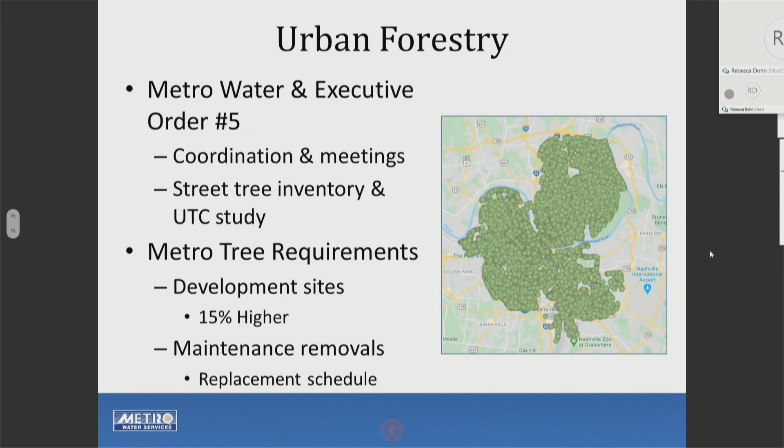So on to something far less pleasant. Many of you have heard that emerald ash borer has arrived in Davidson County. It was first detected here in 2014, and it's going to result in the total loss of all of our ash trees. This means an estimated 271 million trees in Tennessee are going to die.

For Metro Nashville, we've estimated that it's about 6% of our trees, which translates to roughly 1.6 million, plus or minus 66,000. So what are we doing to respond? Well, first of all, we need to figure out what we have.

So we are working on an ash inventory for Metro properties. Parks has already identified over 7,500 ash trees on their properties. In our right-of-way survey thus far, we have luckily found that only 1.6% of the trees are ash.

We have also put together a draft management plan for Metro. There is an EAB working group that meets quarterly. There is a speakers bureau, so if you have a group that wants an ash borer presentation, we have someone who can come out and give it. Of course, that's probably not ideal right now, so we do have a recorded version if your group would like that.

We've been working to notify the public through flyers. We have put out 2 mailers in Metro Water Services water bills. We are posting signs at parks. Here's an example of a sign that we designed for the Parks Department.

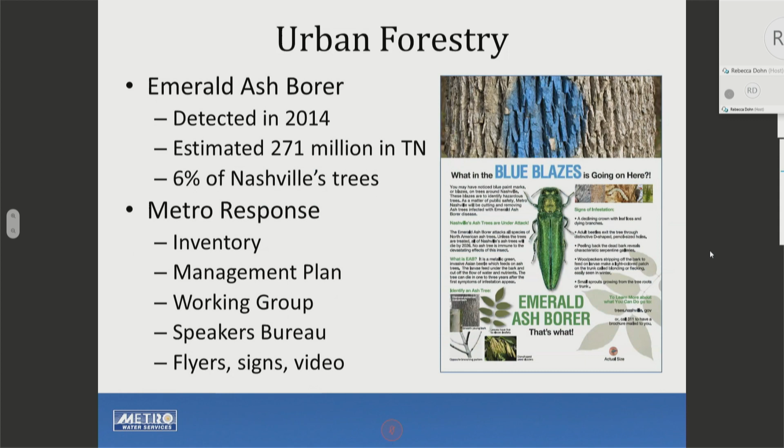So on a happier note, in 2018, we launched the Root Nashville campaign. It is a public-private partnership between Metro government and the Cumberland River Compact, which is the operational partner. Nashville Health, which is Senator Frist's nonprofit, oversees the advisory board. And we work with some other great tree nonprofits, such as the Nashville Tree Foundation and the Nashville Tree Conservation Corps.

So the lofty goal is to plant 500,000 trees by the year 2050, and if you do the math, that's almost 16,000 trees each year. So this means we have to plant trees everywhere. But we did also identify some impact areas where we want to concentrate tree plantings. These impact areas were based on low canopy, high incidence of respiratory diseases, the heat island, impaired water quality through our 303(d) list, and vulnerable populations such as low income and children.